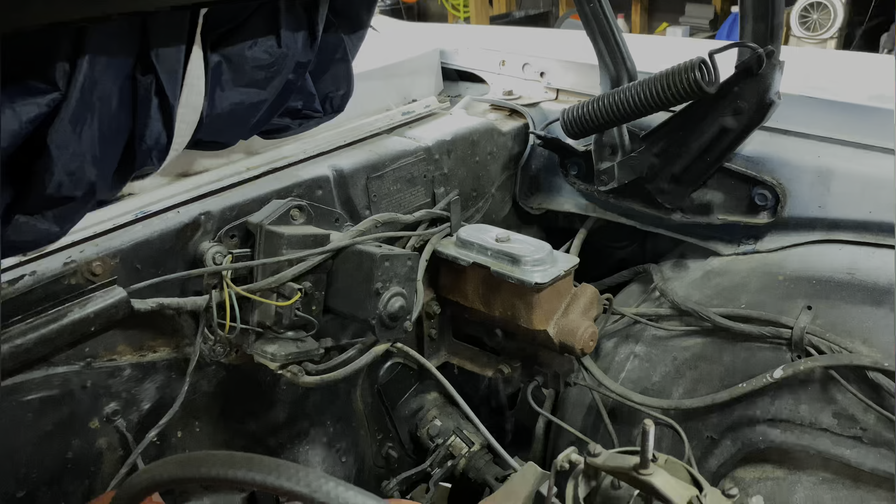Alright guys, we're back. We are going to start removing the old master cylinder, and we're going to hopefully install the new one and the proportioning valve. So here we go, a little time lapse.

Alright guys, I tried to flare this old original brake line 3 times. Each time it split. So what I'm going to do is rerun this hard line all the way down to the soft line that runs to the caliper. I wanted to just use the existing lines out of convenience. The other one flared first try, no problems, but this one I tried 3 different times. So we're going to have to regroup and replace this whole line.

Alright sports fans, the master cylinder is in. This is a 7/8 bore master cylinder. I think it came from a late 70s Monza. I did some reading online and they said it was a good setup for a disc drum setup. Ordered that, it's a Raybestos brand. And then we've got our Wilwood proportioning valve down here, and the bracket - I went ahead and bought a bracket. It mounts behind the master cylinder, makes it really convenient to hang the proportioning valve.

And then this is the hard line that I ended up needing to replace due to the old one splitting. So master cylinder is in, done, tested. So we're on to the next thing.

Alright guys, I got the passenger side done, everything's pulled off, we're just down to the bare spindle. Before I pulled the trigger on the brackets though, Kore3 makes a printout. You print it out, glue it or stick it to a piece of cardboard, cut along the edges, and then stick it on the inside of your wheel, and it'll tell you essentially if it's going to fit or not.

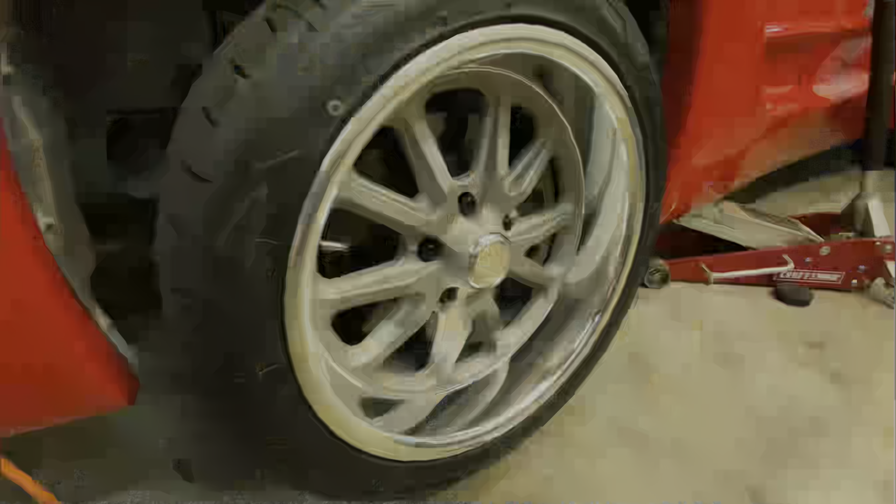Now, I did that on my US Mag wheels, however it was really, really close, so I was a little nervous and wanted to try something. Lucky enough for me, I have a spare C5 laying around. So what I did was, I'm going to flip the camera around and show you how I test fit this. I took my US Mag wheel and tire and bolted it up to my C5, obviously.

I put all 5 lugs on to make sure it was sitting square. And for the most part, other than the wheel weights, the wheel will turn. The pad hangs up a little bit - you can hear the wheel weights. So I don't know how familiar you are with the C5 brakes, but they've got fins on the back. I'm probably going to have to do a little bit of modification to get it working with these wheels.

Just in case you're wondering, this isn't a finished product because obviously this is still on the C5. But at this point in time, it looks like it'll work.

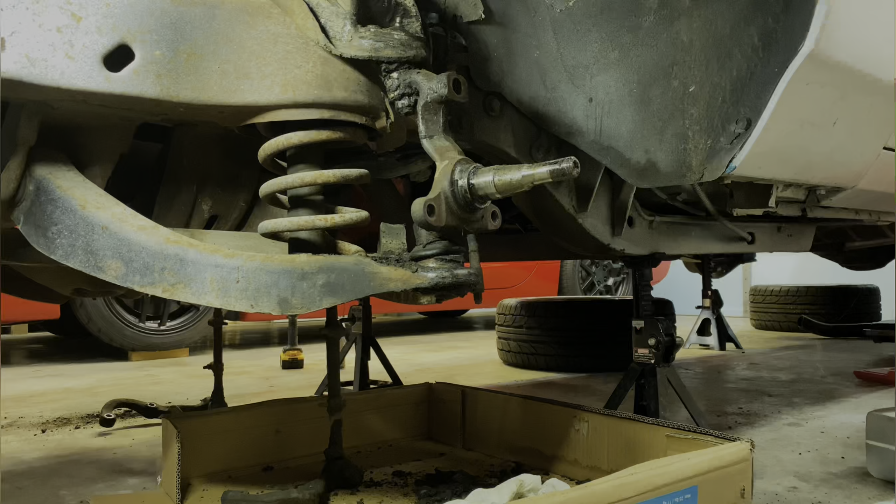One issue that I'm slightly concerned about is how close we are with the spoke to the outside of the caliper right here. These pads are worn - if you put a full, fresh pad on both sides, it should bring the edge of the caliper further out, closer to the spokes. So that might be an issue, we might have to run a small spacer or something. But for now, I just wanted to show you guys an idea that I had. It may not work, may blow up in my face, but we'll find out.

Good news, we finally got some parts, so we can start to put on our Kore3 kit. So this is the original drum spindle, and this kit from Kore3 will bolt directly to it, and it'll allow us to hang the C5 calipers on these brackets.

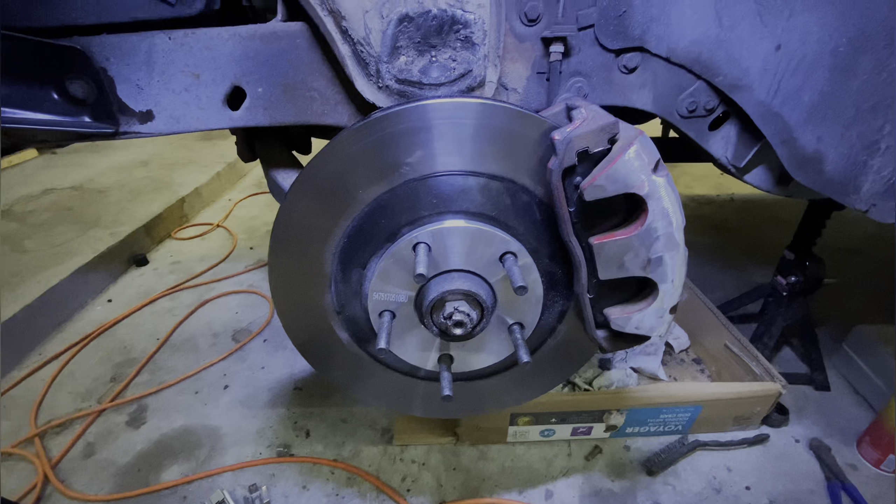Minutes later, one bolt in. So you can see the caliper free floats. Clearance issue I'm worried about is once we have the loaded caliper with pads, the front of the caliper here is what I'm worried about contacting my wheel. So probably going to do a little bit of machine work on the front, maybe the fins in the back. Not 100% sure - obviously we got to get the rotors and spindles all set up before we can test fit the wheels, but at this stage we kind of know what we're doing. I'm going to take these back off, go ahead and get the brackets put on the other side.

Alright guys, we test fit the Nova wheels on the C5, and everything fit. So now we have everything mounted up here, and the rotor fits, obviously, and the caliper and the bracket. Everything obviously fit on the C5. So it's impacting right up here on the wheel.

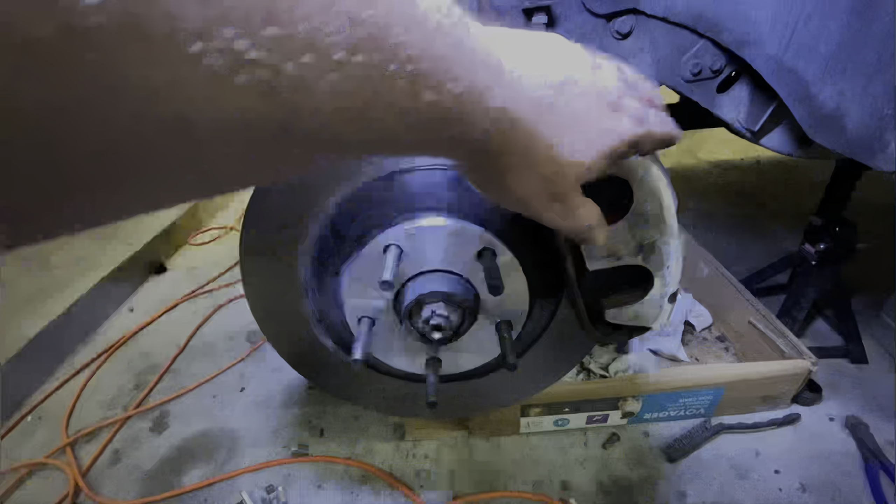So I've already replaced the studs with longer studs, and with one wheel spacer you can't get the wheel flush. With two spacers, because I ordered a 2-pack, you can get the wheel flush, but if you run this stud and this lug up, the wheel won't turn. That's how tight the fit is.

And also don't forget, we still have wheel weights on the inside of the wheel we have to clear as well. So my thoughts are, I talked to a buddy of mine, my thoughts are to move the entire assembly closer to the center line of the hub. So to do that, we're going to have to modify the brackets. At this point, where I'm at, I feel like I'm too far in to abandon the C5 brakes, and I'm also not really in a position.

Also, there's no other wheels that I really want to put on the car right now. There's some really nice stuff out there, but it's out of the current budget. So for now, we have to figure out how to make these wheels and these calipers work.

We're so close, and I'm hoping that modifying the brackets will get us where we need to be to get the caliper in far enough to get the wheel on.

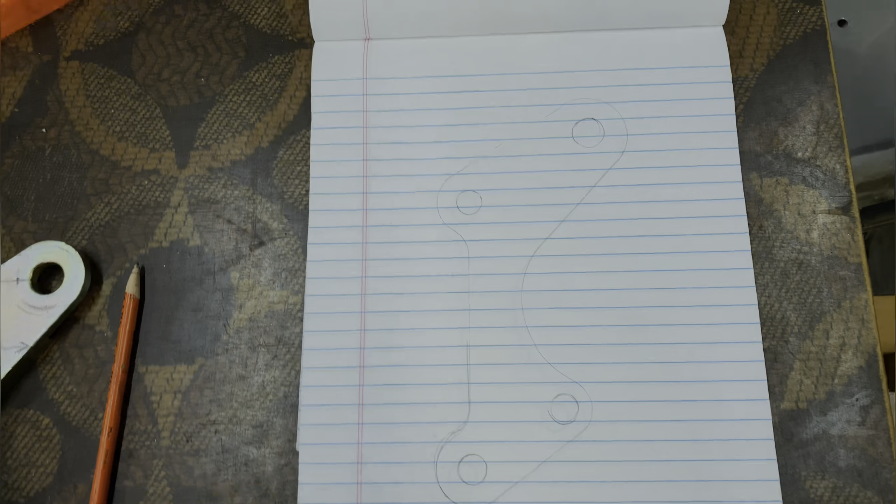If anyone asks, my 7-year-old traced this, not me. So here's the bracket. Right in the middle is basically the hub line. The hub is kind of over here. So the idea is we are going to move each one of these holes about 5 millimeters over.

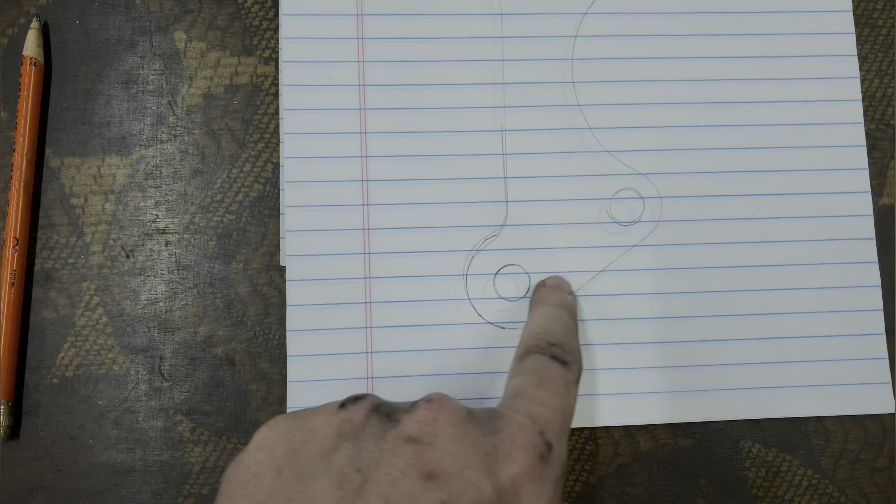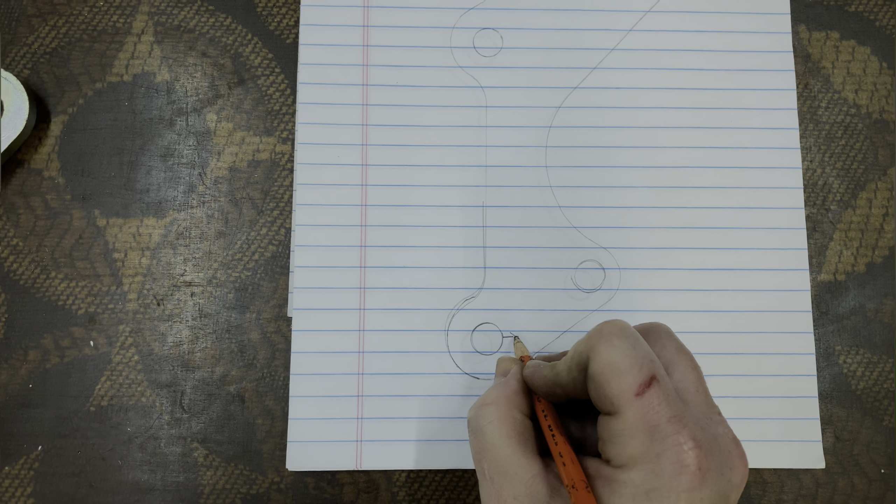So we're gonna drill this out, drill this one out, and we're gonna drill these out 5, and these out 5. So each hole is gonna move 5 millimeters. Trying to draw while I watch the camera. So this one essentially is gonna go this way, and this one's gonna go this way.

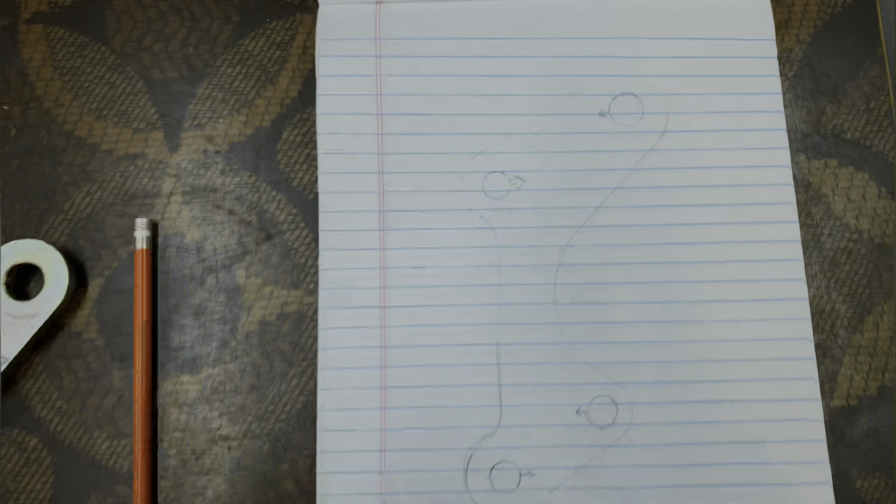So by moving these just subtly, we should be able to pick up almost 10 millimeters of clearance on the back of the caliper. At least that's the theory. At this point, modifying these brackets is going to be the most cost-effective next step to try to resolve the situation with the brake clearance.

So I don't know if this is going to work, but it's worth a shot.

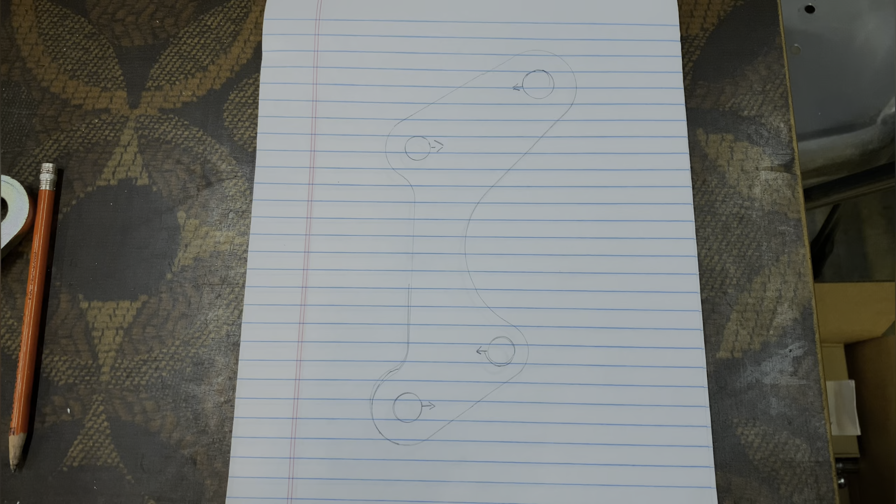Also, side note, just have to throw this in. I'm not a mechanic, I'm not a brake engineer. So me cutting brackets to cram C5 brakes on a car that's 50 years old may not be a good idea. So do your homework, do your research, proceed at your own risk. Brakes are something pretty important - when you need them, you really need them. So if this is something you don't feel comfortable doing, by all means, please do not follow me down this path of darkness.

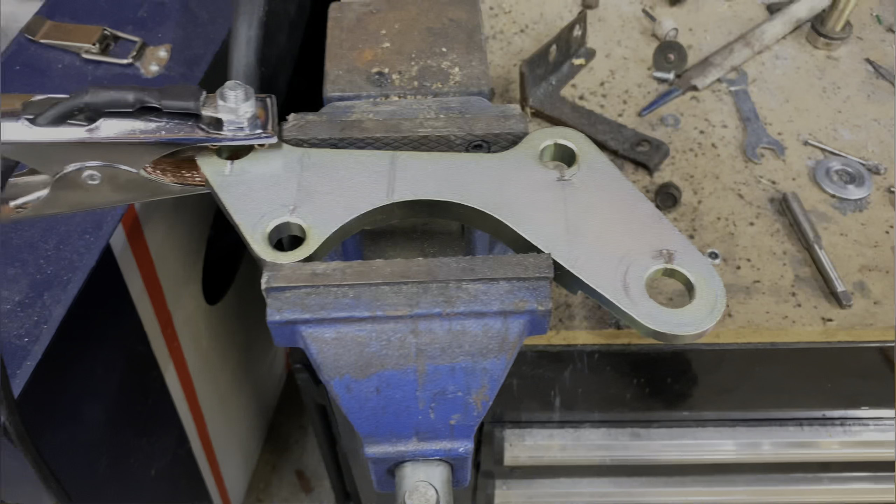All right, guys, I'm going to go ahead and torch out the circles here. It's going to be an oblong circle when I'm done with a plasma cutter. I don't know how it's going to show up on the camera, but I'll try to do a little time lapse.

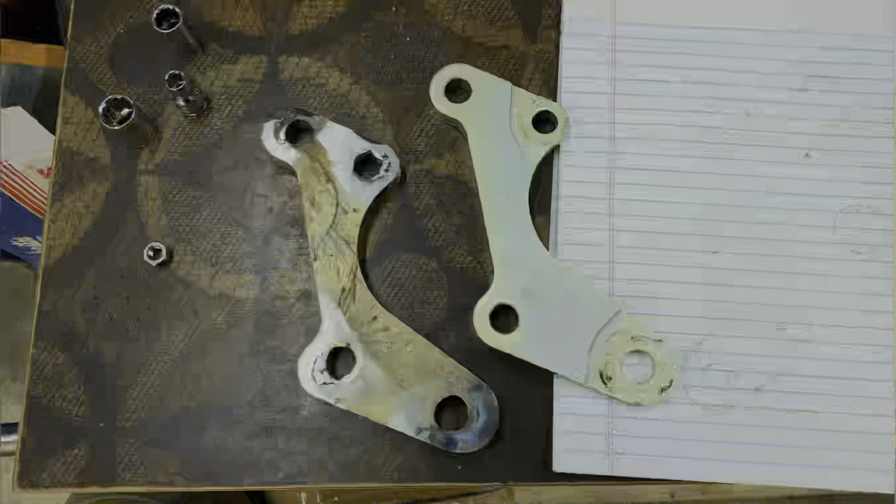Alright, it's not pretty, but we got the bracket torched out. So the next thing will be a test fit. After the test fit, we will come back and backfill the backside of these holes.

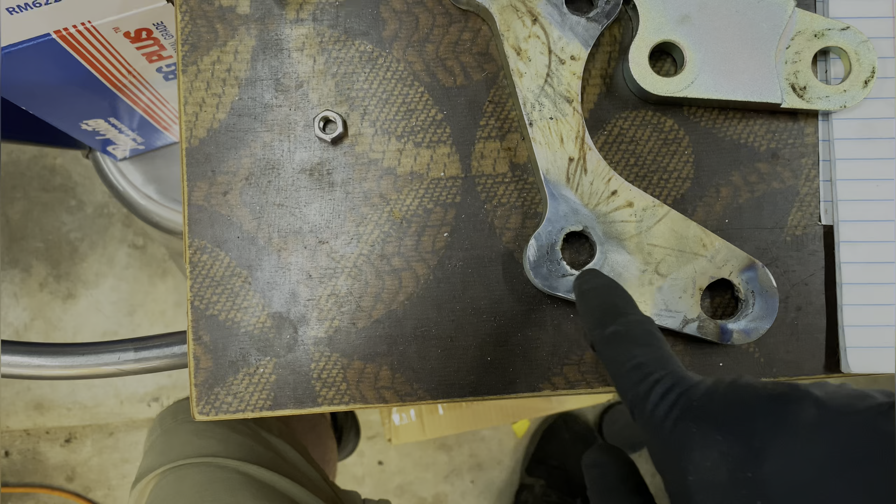So on the left is my modified bracket, and on the right is the bracket as it comes from Core 3. I widened the holes, I oblonged the holes here with a plasma torch, and then I came back and backfilled them with the old trusty flux welder.

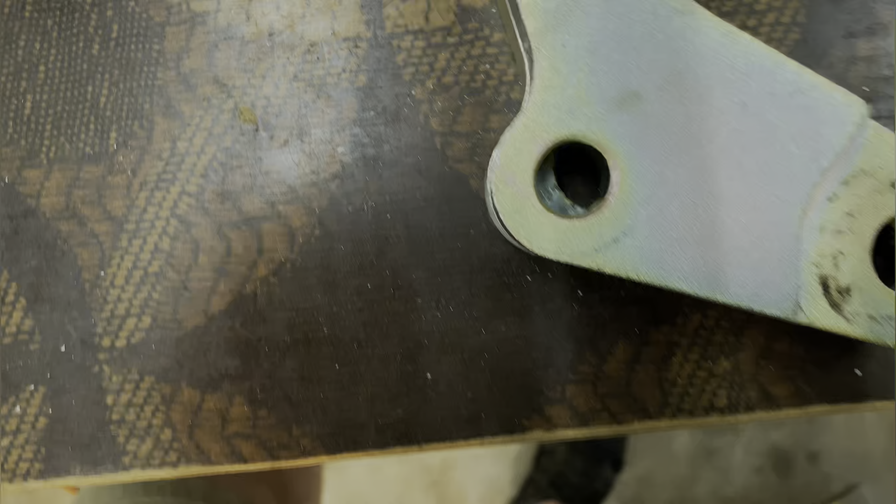So here, if you set the brackets on top of each other before they're mirrored, you can see we've got about 3.5, maybe 2.5 millimeters worth of movement. So it probably would have been fine just to bolt these up without backfilling, but just for some peace of mind, with the stress the brakes are under, and knowing that if this bracket scooted, or if the caliper scooted on the bracket, it would then contact inside of the wheel - I just wanted a little bit of peace of mind.

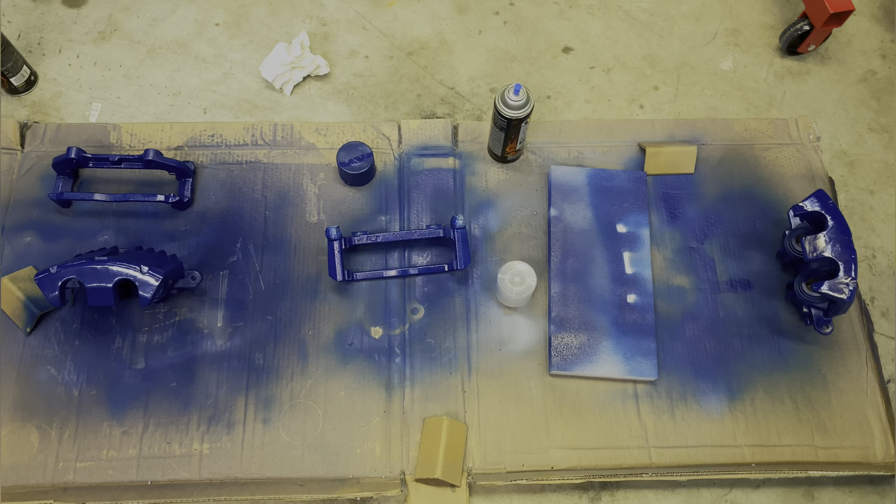Took me a little time. These welds are pretty gross, but it's what you get with flux.

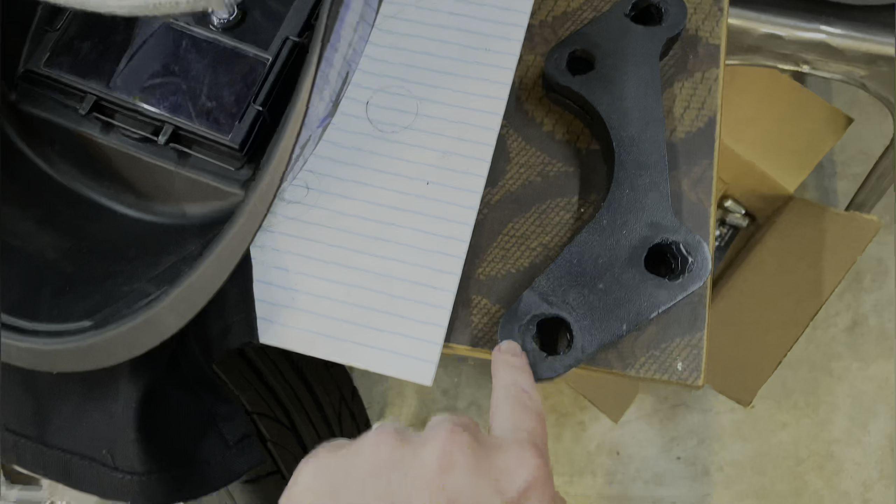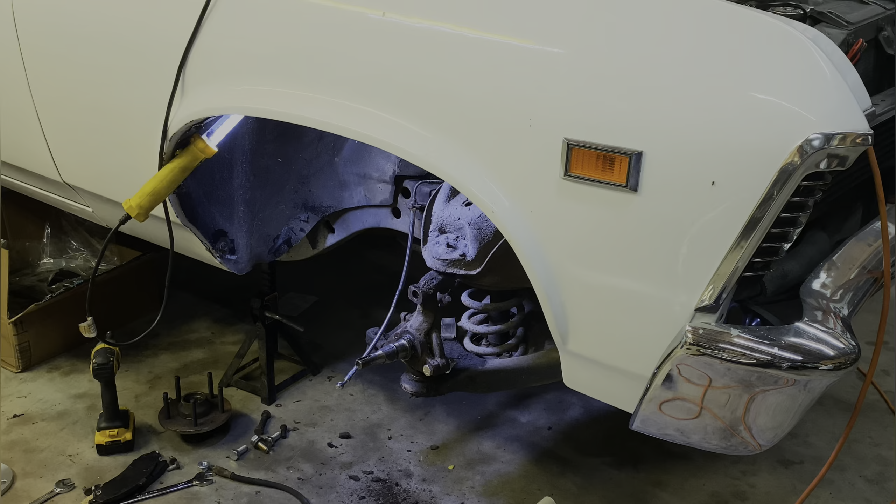All right, guys. Calipers are painted, brackets are painted. Our Corvette adapter brackets are painted as well - don't worry about that, just focus on the positive. Soft lines are on both sides. Master cylinder is in and plumbed with the Wilwood proportioning valve. So now all that's left is to put everything back together on both sides, fill the brake system, bleed it, and hopefully after that we'll be able to put the car on the ground and drive it.